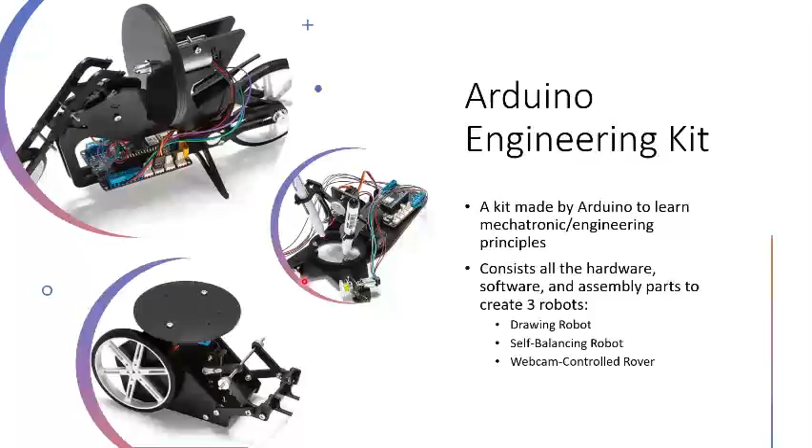This project was made using the Arduino Engineering Kit, made by the Italian microcontroller company Arduino. The kit was designed for college-level students to learn mechatronics and apply basic engineering principles. It contains all the necessary hardware, software, and assembly parts to create 3 robots: a self-balancing motorcycle, a webcam-controlled rover, and the drawing robot that I'm going to talk about today.

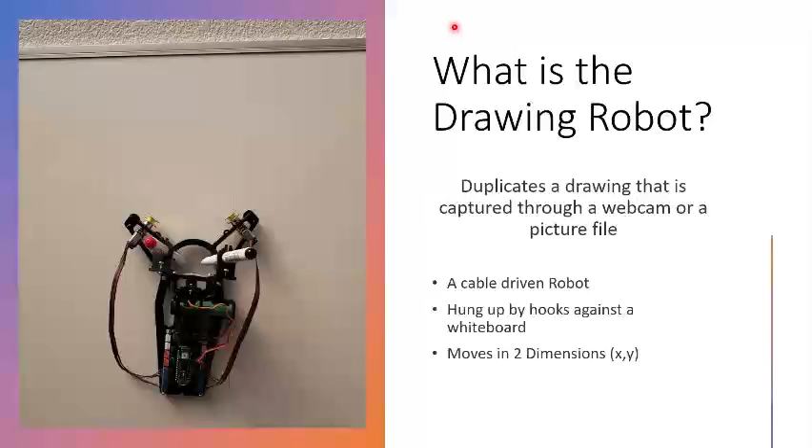The drawing robot can duplicate and draw any picture captured through a webcam or through a picture file. The robot is cable driven by the 2 wires you can see here, hung up by hooks so that the robot is leaned against a whiteboard. This robot moves in 2 dimensions, throughout the X and Y axis. First, I will go over the key parts of the robot.

These 2 DC motors work together to spool and unspool the cables, which control the location of the robot. The DC motors also have gearboxes to help with torque and have encoders to read how many times the shaft has spun so we can read some kind of angular position. The servo down here controls the pens, so it can control which pen is drawing and pick up the pen when necessary while drawing, so it's possible to draw more than just 1-line drawings.

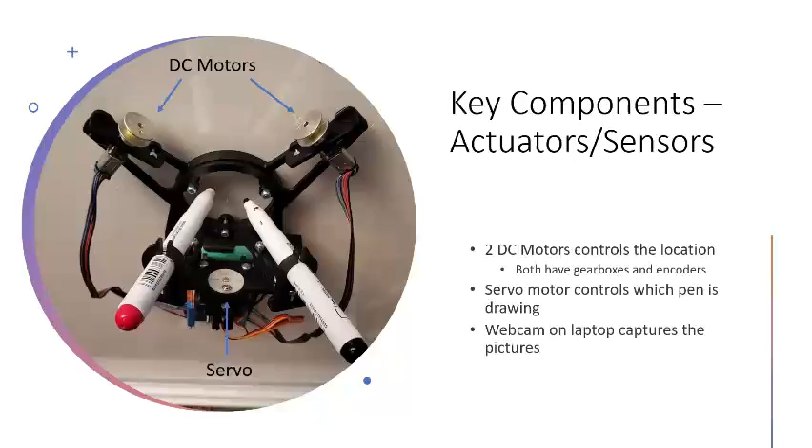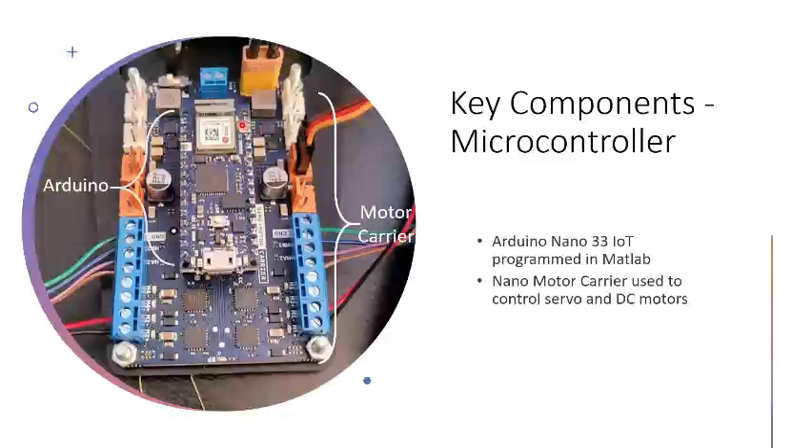Lastly, the webcam on my laptop was used to capture the pictures. The microcontroller used is an Arduino Nano 33 IoT, which was programmed entirely in MATLAB. An Arduino motor carrier is used to control the servo and the DC motors. The servo is connected here on these pins, and the 2 motors are connected here. There is also a lithium-ion battery connected to the motor carrier.

To control the actuators like the servo, motors, and webcam, MATLAB has libraries that can be downloaded as add-ons, so it becomes very easy to control these components.

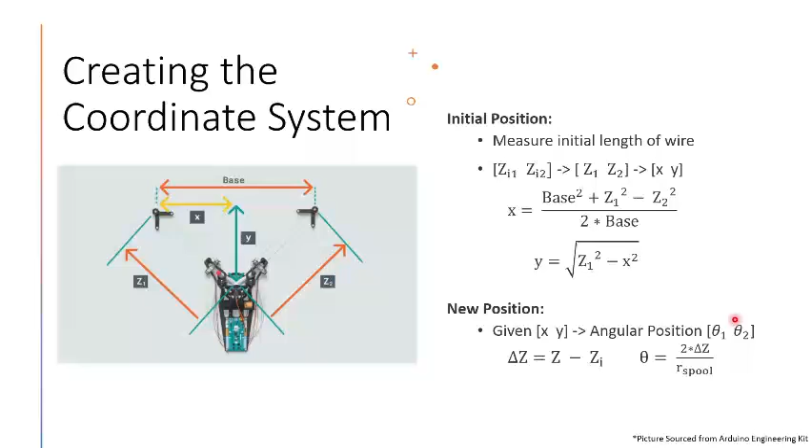Now we must create the limits of the whiteboard. This is necessary because without the limits, the robot can move to a location where it can't function properly. For example, if the robot moves too far down, it will hit the pen tray at the bottom, loosening the cables. And if it moves too far up, the cables can become too tight, increasing the torque of the motor and maybe even damaging the motors in the process.

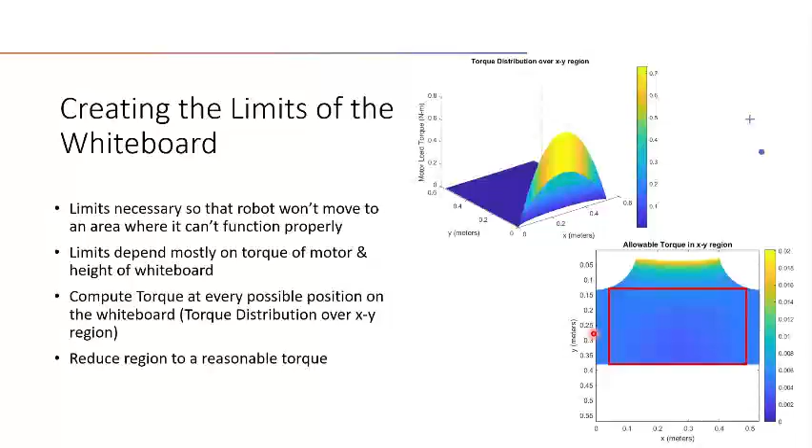The x and y coordinates of the box region is then saved as a .mat file, which we can use later. The last step in getting the robot to work is the image processing. We need to be able to make the picture into coordinates that the robot can move through. MATLAB has some image processing libraries within it, so that makes this a little easier.

We can refine the picture using the thinning function so we can only get the lines of the picture. Since our drawing is simplistic enough, this isn't entirely necessary, but for more complicated pictures, this can be really useful.

From the coordinate values, we have to create pathways or segments the robot will move through. A MATLAB script is used to do this. The script checks if the coordinate values are adjacent to each other. If they are, it puts them into one array to form one segment.

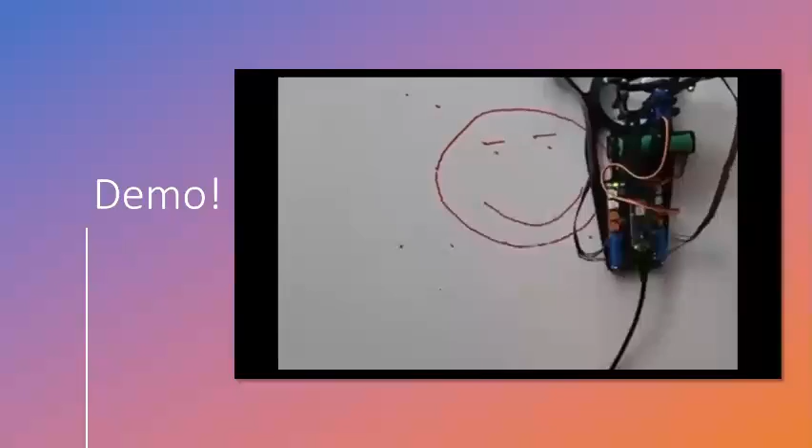Lastly, I wanted to briefly talk about what I have learned from doing this project. Although I ended up with a finished project, there was a lot of complications along the way.

I had a DC motor with a broken encoder that was basically dead on arrival, so I had to get that replaced along with an overheated servo.

Lastly, I had the robot drawing the picture rotated so that the vertical axis of the picture was actually being drawn along the horizontal axis on the whiteboard. But I eventually figured out that this was due to the cables being spooled in the wrong directions, and in the end it was an easy fix.

Throughout these complications, I learned a lot of patience but also felt very rewarded once I overcame them. It was a great learning experience and would definitely recommend the Arduino Engineering Kit to anyone who wants to try these kinds of projects. It was also cool to translate something in the physical world into something that electronics could understand and perform the desired response back.

Overall, this was my first attempt at programming in Arduino, so I realized a new level of confidence in my skills and my capability as an engineer.